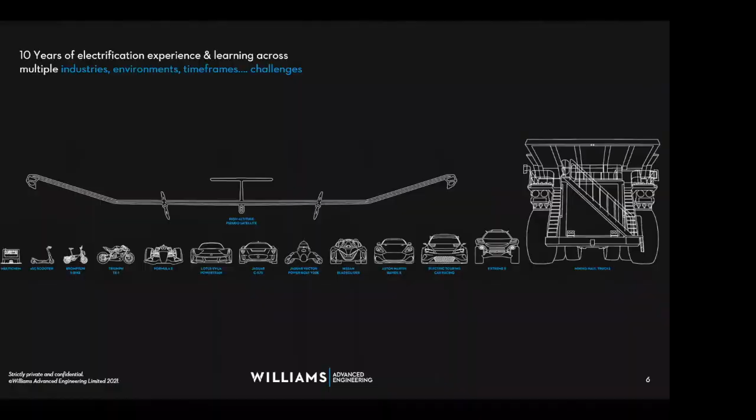So before I come into the mining industry specifically, I think it's worth just really outlining where our pedigree in electrified systems comes from. So as I mentioned, it started in Formula One with KERS development just over 12 years ago now.

And we actually first took that technology from the racing circuit through to automotive for the Jaguar C-X75 road car product. Sadly, it didn't go into production for various reasons, and I think there's still engineers at Jaguar that would have loved to have seen this go into production, but the stars just didn't align, sadly, for it. But we effectively took a Formula One inspired powertrain and put that into a road car.

The next big jump for us was being the principal supplier to all teams on the grid for the first generation of the Formula E series, for seasons 1 to 4. And that really opened the doors for us to talk to several car manufacturers that entered teams into the series. So after that time, we started taking that motorsport derived technology towards the automotive sector initially, working with companies such as Nissan, Audi, and indeed Jaguar Land Rover.

And we've continued to initiate those projects ever since, and across multiple sectors. So alongside maturing our processes to suit more stringent application areas such as automotive and aerospace, we've still continued to break records with things like the Lotus Evija battery pack design, which is a 2,000 brake horsepower hypercar that's due to go into production in the latter part of next year. So we've been the main technical partner to Lotus for that product.

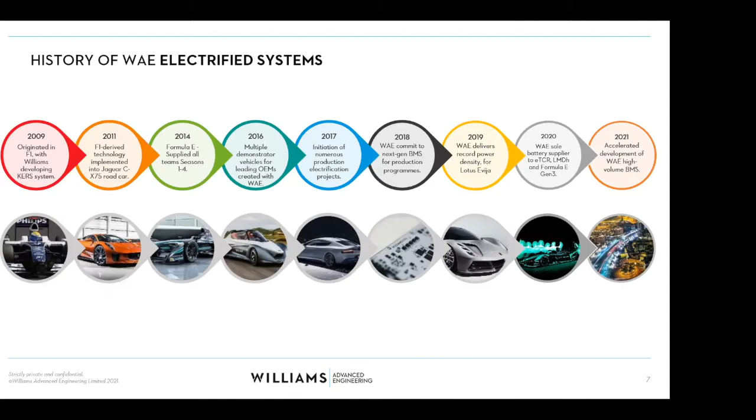So really getting into the meat of the evening's detail and information, I think it's worth talking around what the approach is to the transformation in the mining sector. So I think it's well understood that everybody wants to do things greener and cleaner, but it's a really interesting market to actually do it in. So if you think about mining, it's a very established industry. And so effectively bringing electrification to the table is quite disruptive to the existing supply chains that are in place.

So the vehicles are completely built up on diesel electric powertrains, typically. High fuel consumption, and also given some of the remote locations of the mines, actually the cost of maintaining and running the vehicles is incredibly high. So when we were looking with one mining operator as an example, effectively because of shrinkage, getting diesel to their particular mine, it worked out an effective cost of £12 per litre to get diesel to the mine.

So if you get upset next time you pull up at Esso, it could be a lot worse if you're a mining operator in the wrong part of the world. And they have very little energy independence. They're spending billions of dollars a year on energy.

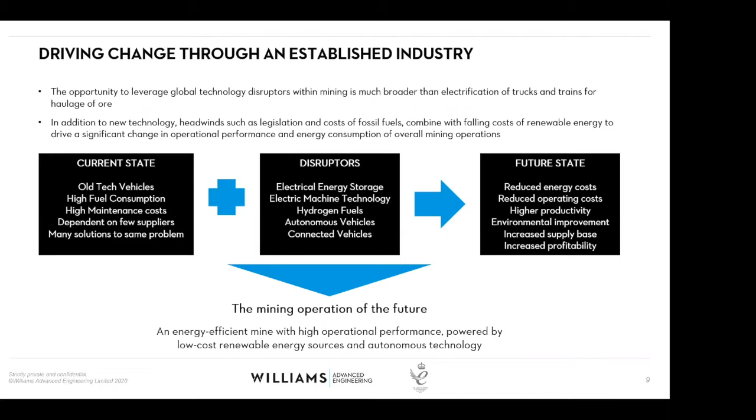So that drive for energy efficiency creates a real need or a pull for a collaboration group. So talking about those areas, the disruptors coming to the table with these technologies, they're simply technologies. So we work with the mining operators as an integrator to take and select the right technologies to effectively make sure they pick the right winners.

And we work with those mining operators as their trusted engineering partner to reach that future state of reduced energy costs and increased uptime and productivity. So I wanted to add a bit of colour on top of the simple doing the right thing and zero emissions, which is of course critical as we're racing towards the COP26 conference now.

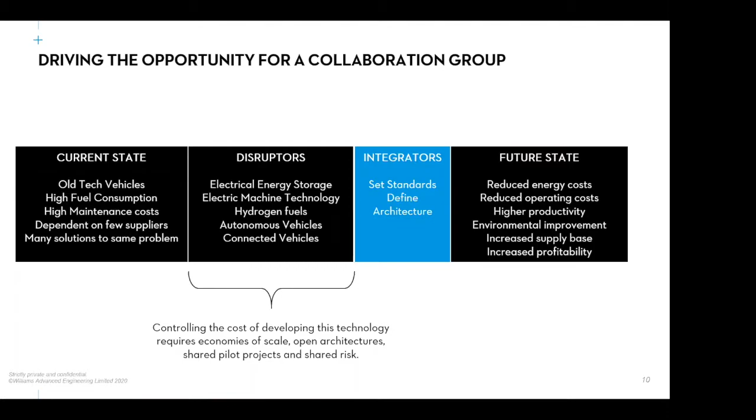You know, it's just worth thinking about the other aspects at play. And so here's just a nice pictorial view of how that looks. So we effectively work on behalf of the sponsor, the mine operator, to bring those technologies together. And step one is really to get to a concept study.

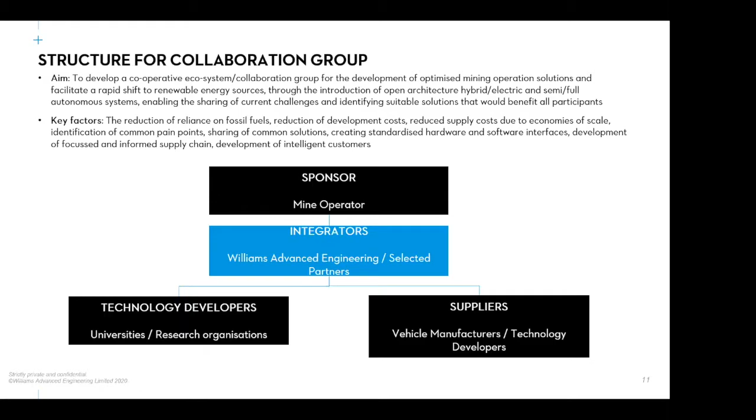So when you look at a whole mine, it's actually quite daunting. Kind of what do you pick to go at first? And certainly we can't do it on our own. And so we start creating key areas to research, to model, and effectively define an approach to achieve those goals pragmatically. So pick the biggest wins first, which is why you look at things like haul trucks, because they are the biggest consumer of energy at a mine,

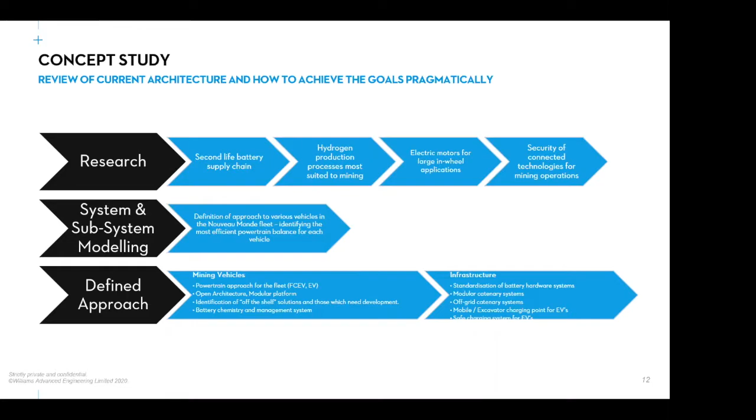apart from actually crushing the rock, which I've actually found out, having worked with these mining companies for a few years. Crushing rocks consumes 6% of the world's energy. So I find that an astonishing figure to take away from these conversations. You know, anything we can do to do that more efficiently would have massive gains in sort of global energy consumption.

So just an example implementation strategy that we came to, and then really it's about looking at that stepped approach around not just the haul truck and the other vehicles, but also a big part of it is the infrastructure. So these machines are enormous, and therefore the energy required to power them. If you move to an electrically powered vehicle or a hybrid sort of with a fuel cell vehicle, you need to get a lot of energy to the mine.

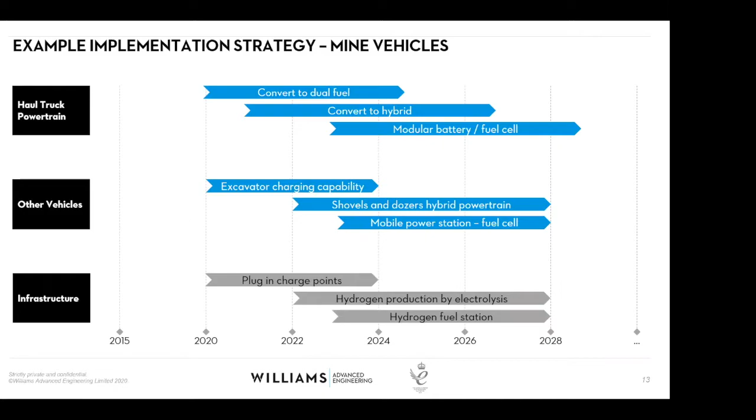So there's also making sure that all the technologies are going to marry up at the right time at the mines to deliver the full system. So we look at a mine as a whole system rather than just one product. So big picture, when you think about a mine, it's not just about the haul trucks. You've also got to consider, as I mentioned, where the energy is coming from.

So top level. So we were effectively engaged to develop this new fuel cell electric vehicle, which is an ultra class mining truck. So the existing powertrain, which we'll come on to in a little more detail shortly, is a diesel electric. So there's already an electric drive unit in this particular truck. And it's part of that bigger picture that I was just describing.

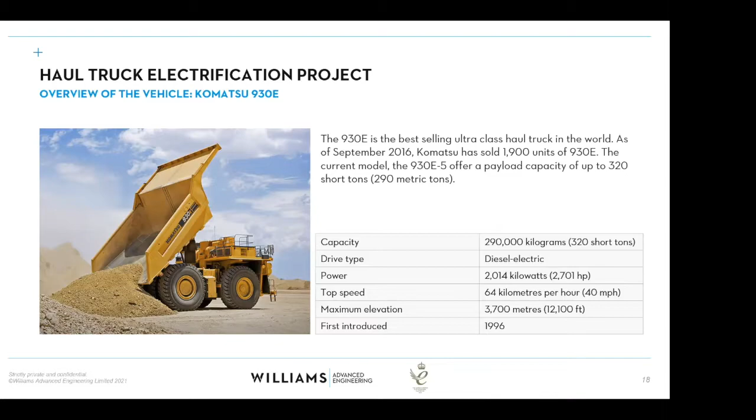And there's just a bit more data on this particular truck here as well. So as I say, 290 metric tons in terms of payload capacity. So these machines, whilst they're only moving at a maximum of 40 miles an hour, they're requiring 2 megawatts of peak power from that system. So it's an extremely high powered system. So that's the donor vehicle on the project.

So thinking about the classic systems engineering approach. I'm sure anyone in an engineering environment would have seen various versions of these V diagrams. So I just want to step through each of these stages that we've been through on the project and give a bit of insight as to how we've approached that design.

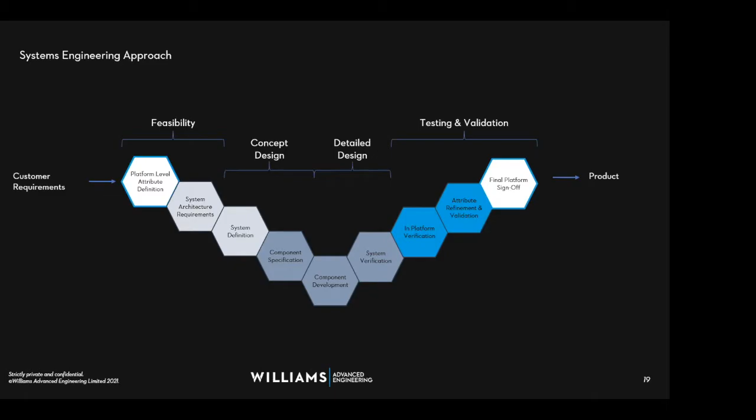So first of all, really through the feasibility and concept design, we looked at those requirements, knowing that the vehicle was already driven by electric motors. The project was effectively around the blue bit. So what we've delivered here is removing that diesel powertrain and having a fuel cell module and battery pack.

We had to manage the trade-off between what the fuel cell was capable of generating in terms of energy and then balance the size of the battery pack to ensure the plant had the right trade-off for 20 hours of running a day. The opportunity for topping up through the day is relatively limited. So we had to work out how much hydrogen we had to be able to take on board in a given period of time and size the system accordingly.

And then from an electrical controls perspective for the first prototype, we had to effectively convince the existing DC link and motors that they were still connected to a diesel engine. So there was a bit of additional complexity there.

But I suppose really the significant unknowns for us were a major challenge. It's a classic situation with this project whereby the CEO of Anglo American have made a statement around when this truck would be running. And so we had to make our program work in that timeline. So we had to use our best judgment and simulation knowledge to ensure that the product was well engineered, was able to withstand significant shock loads.

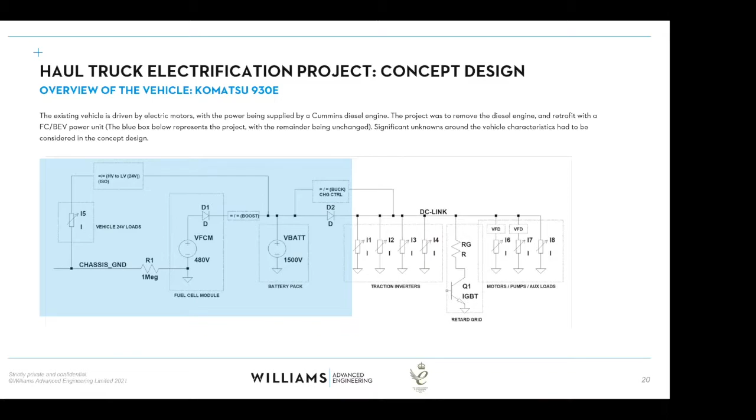And moving into the more detailed design space, we got into the system layout for the battery solution, operating at up to 1500 volt peak. We took the approach to build 8 sub-packs and effectively connect 2 series and 4 parallel for those 8 sub-packs, giving you a pack mass at battery system level alone of 8,000 kilos. And actually the full drive train fully assembled is just short of 22 tons. So this is a significantly large powertrain pulled together.

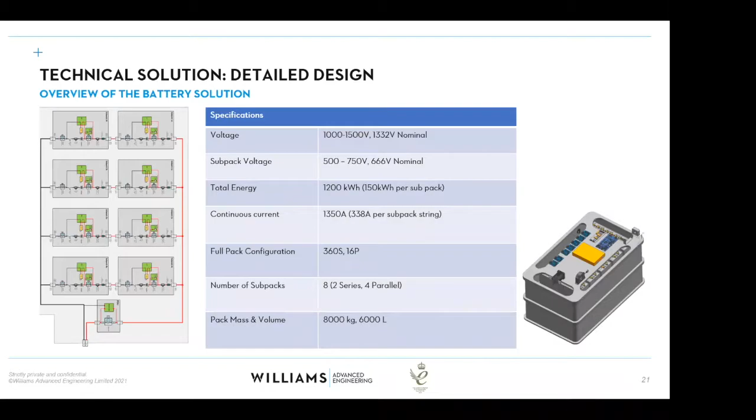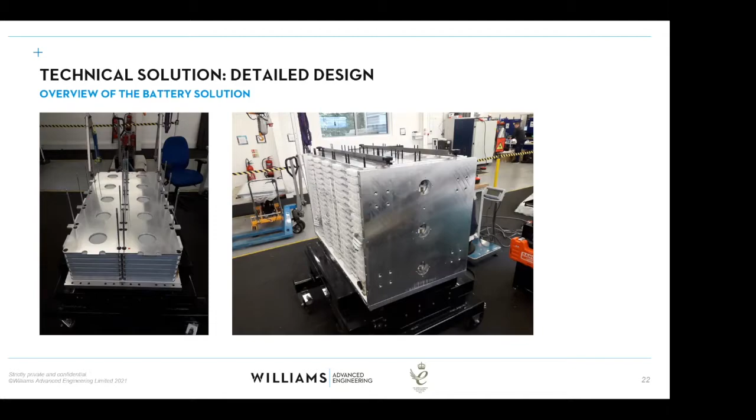So just to give you an idea of the battery solution in detailed design terms, these are some steps of the assembly. We've built a number of modules up here, and they effectively stack into this frame. And as you can see, with it being a relatively fast turnaround program, we've machined quite a robust enclosure from solid, and that stacks up to give us quite a robust looking system. So eight of these go into the truck.

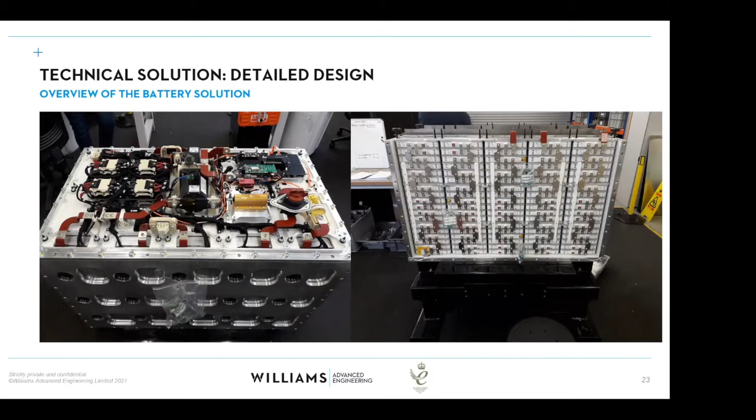So that's a bit of an overview of the project, gives you a bit of a view of the kind of complexities involved and the sheer scale of the system, not just from a components perspective, but actually the infrastructure that needs to be considered. And what this effectively does from a kind of powertrain perspective for the haul truck is it takes it completely into a state of energy independence, as we mentioned.

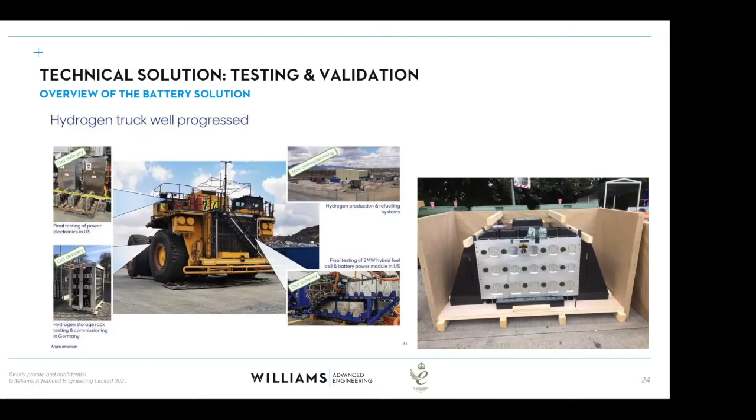I just wanted to touch on actually where we're going next. So that's a fuel cell EV. We're now also working with another mining operator in Australia called Fortescue Metals Group, or FMG, and we're designing, building and testing a fully EV truck for those guys. There's not as many pretty pictures to show you on that one at the moment, because this is a bit earlier in the development. But the interesting challenge for this, talking about infrastructure again, is a slightly smaller haul truck at a mere 240 tons rather than 290.

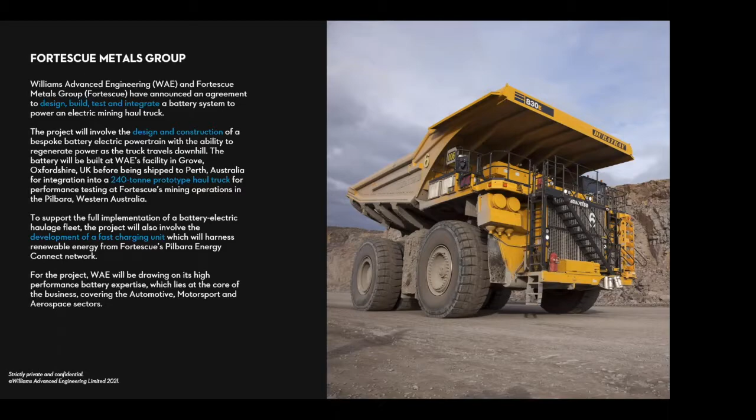With it being fully electric, we're developing a charging capability, getting closer to 15 megawatts of continuous current to charge the battery packs in an appropriate amount of time. So again, we're looking at solving that off-grid problem at an infrastructure level. So just a bit of an overview of another interesting activity. So really the takeaway from our side is, we're very much at the forefront of these first-of-its-kind design and system integration topics.

I think the mining sector's a really interesting study for anyone looking at off-grid operations. The drivers to be off-grid will be different in different sectors as we see it, but certainly a lot more work to be done. I think it's very promising that an industry that's relatively cash rich, such as mining, is driving these solutions forward, and they're keen to find other adopters for it as we move into an electrified future. Greater uptake enables commoditization and driving down of costs, which is ultimately a major consideration for any business looking at these topics. So that's the overview from my side of where the mining industry is, some of the challenges that we've seen and will continue to see.

But I'm really keen to open up and invite any questions and have a bit of a discussion around it, really. I think there's probably a lot of parallels that you may see in some of the agricultural applications where maybe the infrastructure isn't as strong as it is in other areas. And so it'll be interesting to hear your views on that, and happy to take those questions now.

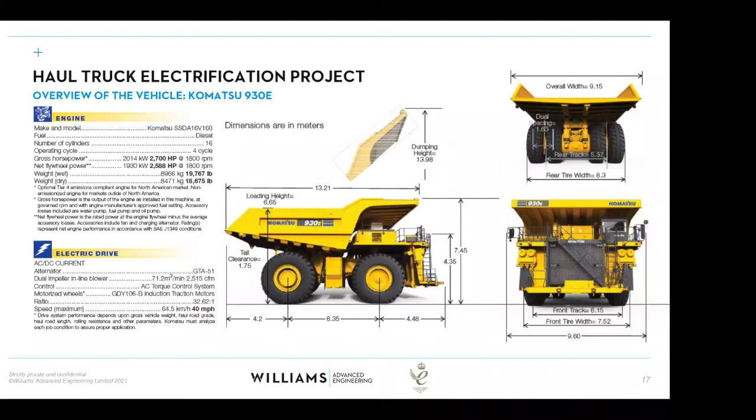Okay, thank you. Just to clarify, James, the Komatsu truck we're talking about here, have I got it right that it's electric powered with a diesel generator? Essentially, it's a diesel traction engine sending power to an electric drive unit. Okay, and is that done without batteries? Done without batteries, yeah. Okay, so what you're doing here is replacing your diesel generator with a sort of fuel cell battery hybrid, doing the same thing.

Yeah. Interesting. How scalable do you think that technology is, coming down to maybe a farm level or a much smaller quarry installation? How small can the big picture be? Yes, without too much effort, looking at the system we've got here, we could be an eighth of the size. We're one of 8 sub packs from a battery perspective, and 8 fuel cell modules at the moment, so you could literally make it an eighth of the size. So it's relatively scalable.

It's been designed to be modular because the operators are looking at smaller equipment as well. Some don't need the ultra class trucks, so coming down to smaller dumpers has got to be something we can do, and that's by design. We need this toolkit, otherwise we're going to blow the business case for other things out the water. So the idea is to make the whole toolkit very scalable. It would be interesting to understand the specifications of agricultural equipment worth looking at as a potential adoption case. The scalability is critical.

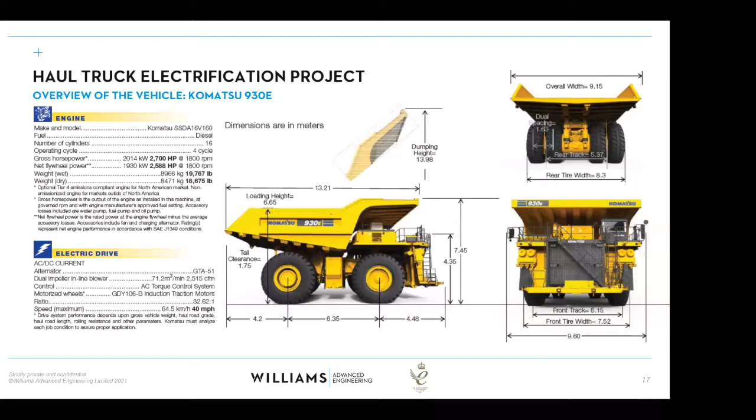And I think the key for us, or the message that we give, is that we're a capable organisation. We can solve a lot of problems, but a big part of this is partnerships. I don't think there's one organisation that's going to solve every one of these infrastructure issues. And so we talk to potential partners around our collated view from mining operators of this would be a really nice way of doing it. And we have to allow for that technology readiness, I suppose, what's going to be available. But absolutely, you're right.

There's already a lot of electrical draw elsewhere in the mine. Yeah, I mean, when I was at Cummins, I know there was a customer that was looking at fitting their haul trucks with a pantograph to pick up off overhead power lines to give sort of like extra power to get the trucks out the mine. But I don't know whether that actually came to anything or not.